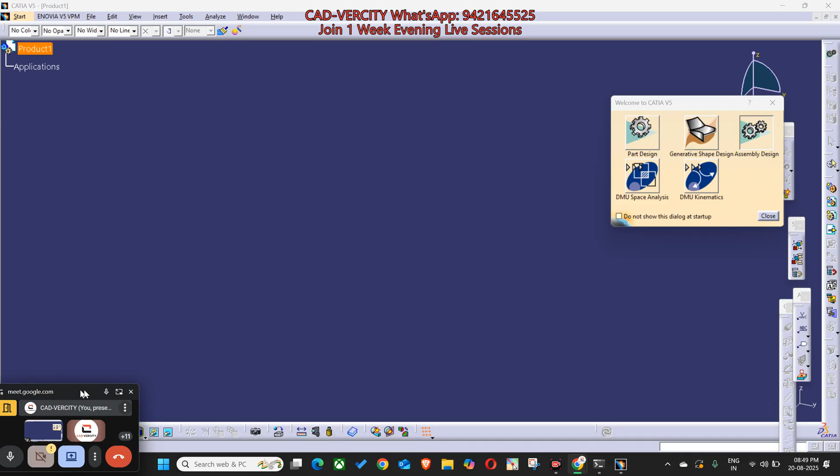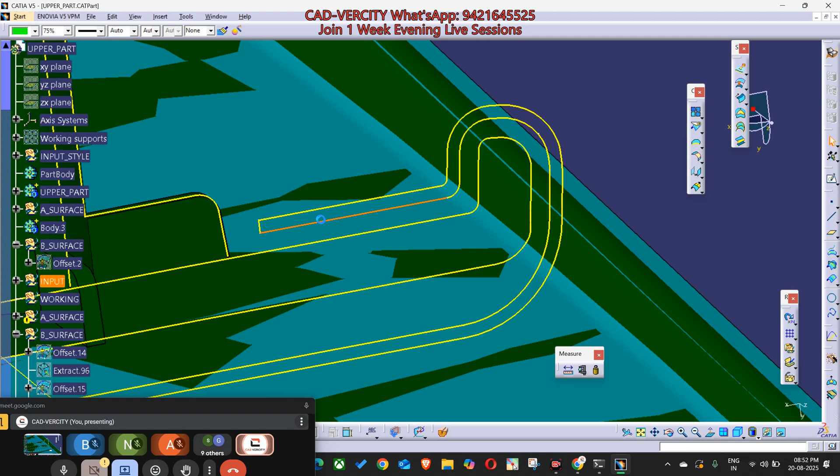Is it visible now? Yes, sir. So this is a complete product in a new window. If you have any doubt, you can directly unmute and ask. Don't wait for me to stop. So here we have master sections. Raja has defined some master sections. Let me explain what this is. The upper curve, this one is the leather.

So what is a master section? Suppose this is a part. Let's say Nilay, you are going to work on this part. But you have one team lead. Let's consider Ganesh is the team lead. Ganesh has at least 4 to 5 members in his team working on the complete project. Here you have one part. On the next side, in yellow color, you will have the structure part like this.

Third part is your grill part, speaker grill. Fourth will be, let's say, the armrest of the door. You know the HMI over here, you have some switches over here. Yes. Okay. And let's say again you have the map pocket. Let's consider this as a map pocket. This will be your map pocket.

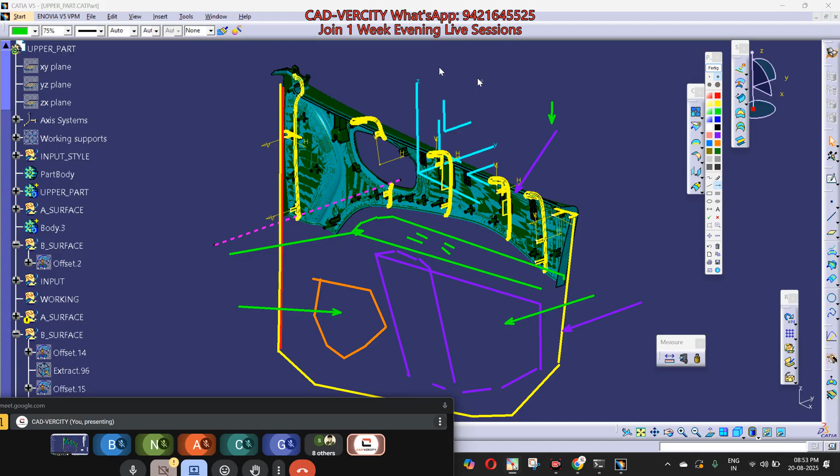Okay, and what is the role of Ganesh now? Ganesh as a team lead will define how the parts will assemble on each other, and how the complete assembly will be pre-assembled over here. You will have pre-assembly like this, and you will assemble the complete door panel assembly. Let's call it a sub assembly. This will be a sub assembly for BIW. You will bring the complete sub assembly of door panel and you will assemble it on the BIW like this.

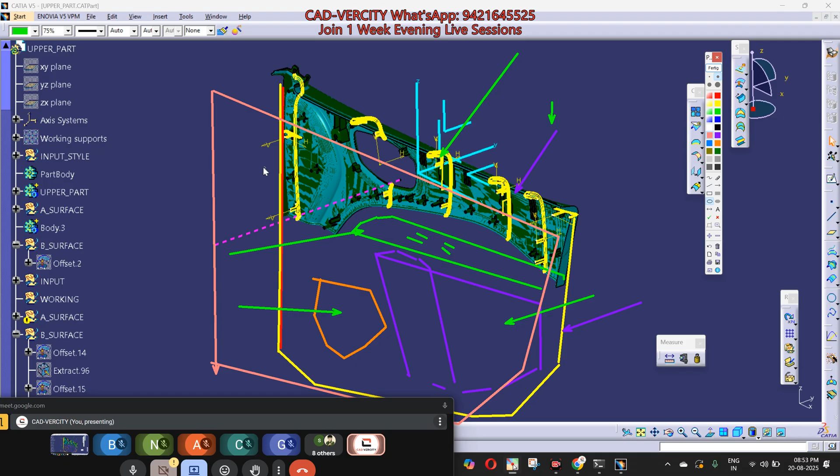Here you will have, sorry, here you will have the BIW like this, the metal structure on which you will have some beads for the strengthening and you will have some holes for the fixation like this. Okay. Tell me in which direction you are going to assemble the complete assembly. So how to decide the directions? Can you see the compass? We call it a compass. Z axis, X axis and Y axis.

Right now just consider we are going to assemble the complete door panel assembly on the BIW in Y direction. This is Y direction on this side, so let's consider this as negative Y. I will push the complete assembly on the BIW in this direction, negative Y direction. This direction is okay for me, no issue. So Ganesh will decide: everyone, we are going to assemble the complete part. Then we will assemble the sub assembly of door panel. It will be a top assembly on the BIW.

Now for the assembly, we already have one strategy. We are going to use some clips which we will receive from the vendors. Tell me, will you design the clips or will it be a standard part? It should be a standard part. It should be a standard part which we will collect or buy from the vendors. Okay, I have shown you the clips. Now, what is the use of master section then?

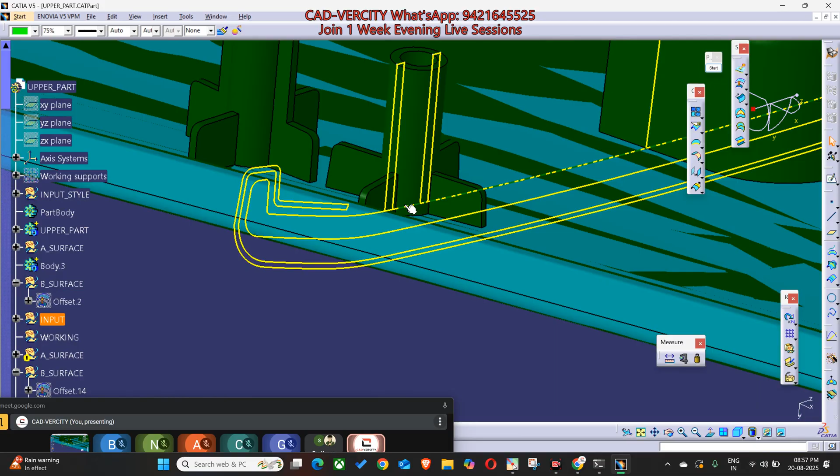If you see over here, what is master section? Master section we have already done. We will repeat this topic in the next project, no issue. But in master section we will define the fixation strategy, how this part is going to assemble on the next part, how will be the trim. For new guys, I think you don't have an idea what trim is. The trim word we will use for two components. It can be a fabric, it can be a leather. We will call it trim. It can be fabric or leather.

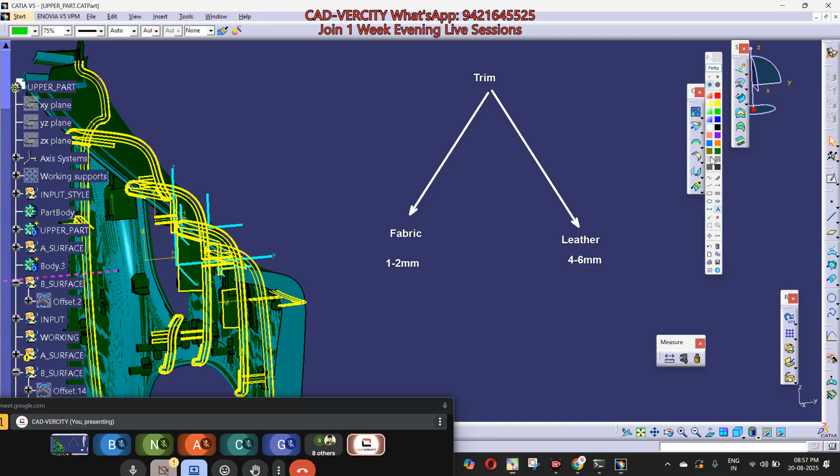Fabric means it can be a cotton or nylon material, just like a seat cover. Leather will be a little bit thick compared to fabric. Leather thickness can be 4 to 6 mm. Let's say fabric thickness will be 1 to 2 mm. We call it trim. Just keep the trim word in mind. Whenever I'm using the trim word, it will be related to fabric or leather. It's not the command. In CATIA we also have the trim command, but that is different.

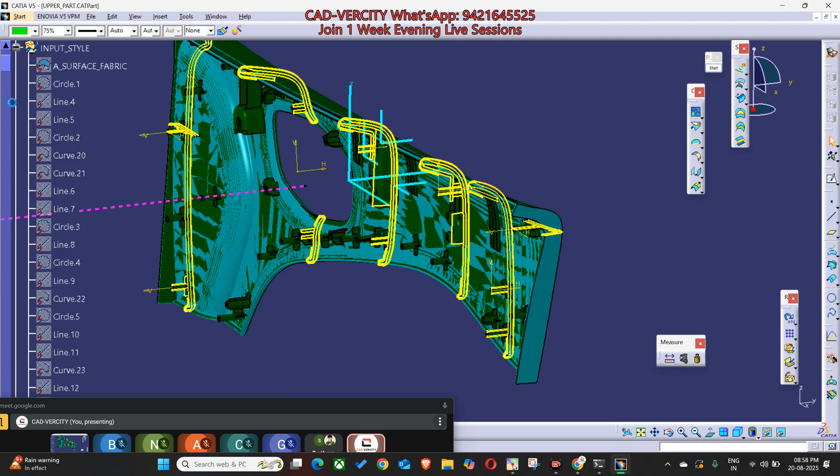So what is this? We have this style input A surface, class A surface. Here, input style A surface. Right click, and this is a surface. This we will receive from the OEM, otherwise we will receive it from the styling team. This is a style surface. Now we have to make a plastic part from this, but Ganesh has received some input as a team lead.

You have to consider the trim wrapping of, what was the thickness? Anyone remember? 2.7, I think. Ganesh, what was the trim thickness? Okay, sir, 2.7. And what was the trim thickness plus padding?

0.6, 0.3, 3.3, sir. Sorry, 3.3. 3.3, sir. No, 3.3 means it will be total. Yeah, total. 2.7 plus. Okay, so this is 3.3: 0.6 plus 2.7. Yes, correct. Yes, sir. Okay.

So trim of 3.3. It will be wrapping on the plastic part. Ganesh has received this input. So what is 3.3 then? It will be a trim thickness. So what will be the trim thickness? The fabric or the leather will be of 2.7 and this will be the foam padding.

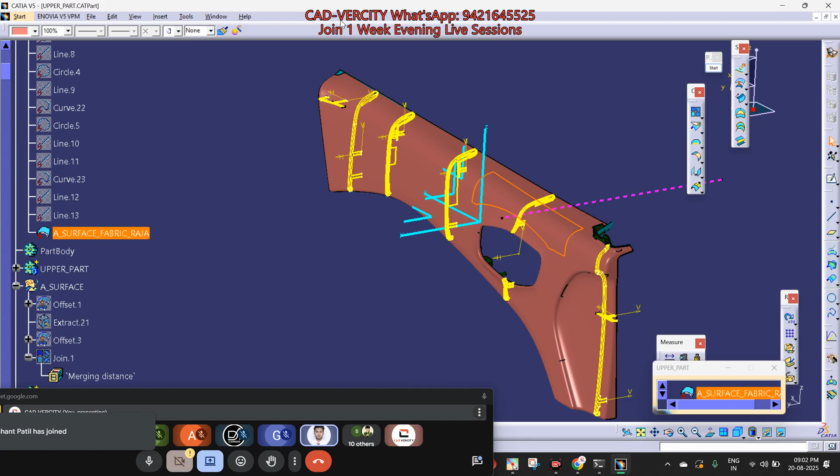Yes. Dassault is working on it, but how will AI be? I will explain this in another session. We will first focus on the project. I will explain how AI is integrating in CATIA. Even if you search on YouTube, you will get an idea how AI will be in CATIA. We have some videos.

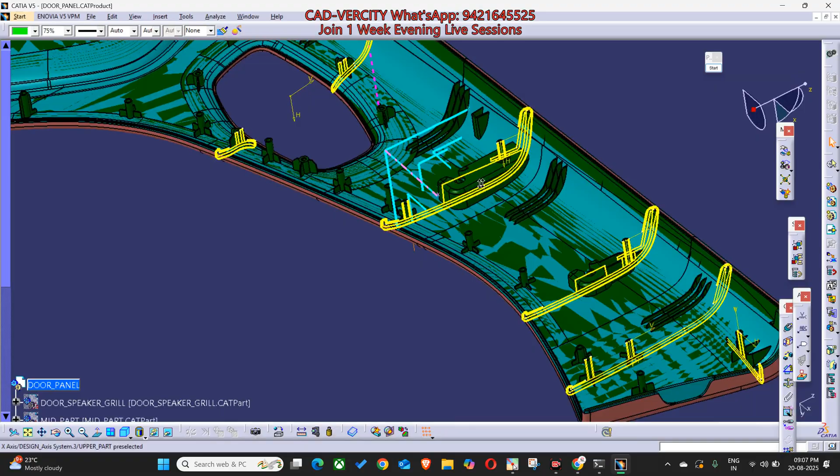Coming back to master sections. Now you got the idea. We have multiple parts. We have leather trim. Now we have the trim thickness: 3.3 will be the total, the leather will be 0.6 and padding will be 2.7. These sections we have drawn with the help of the sketching tool. We will learn this in trainings. Right now I will just explain.

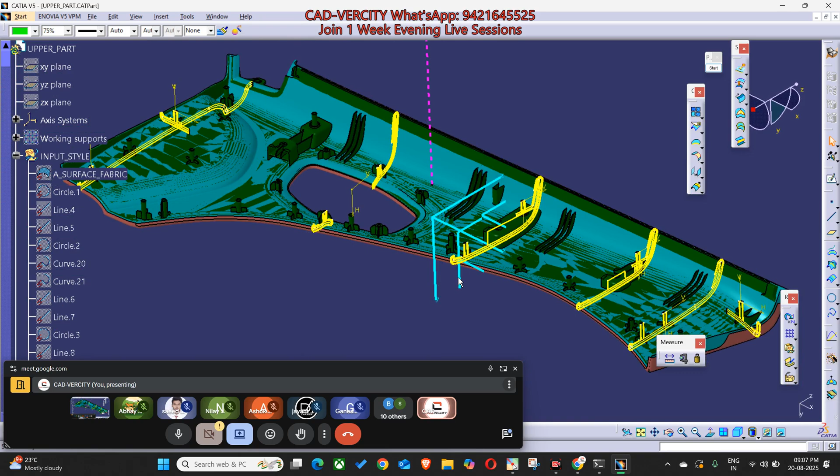In master section, Ganesh as a team lead will define the strategy: how parts will overlap, which type of fixation we will use, where we should use the welding bosses, the screw bosses, the dog house snaps, the locator pins, fixation towers and all. Here you can see, in master section we have defined the screw bosses.

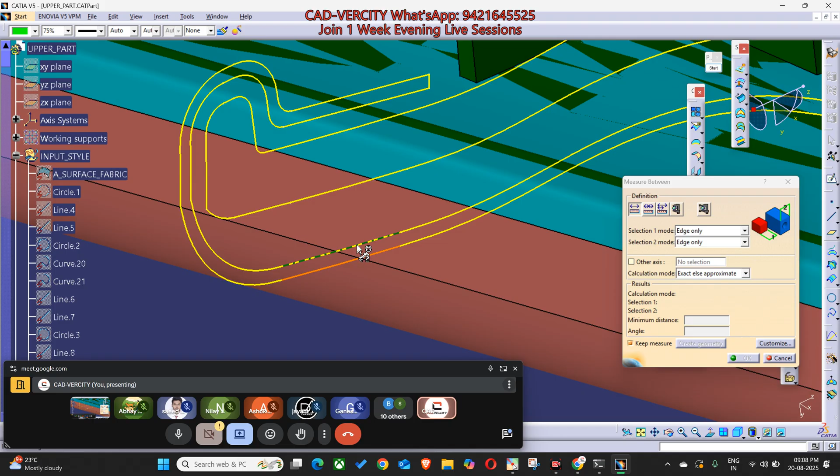Can you see the upper portion? This is the leather. So what is the thickness? Measuring tool, from this edge till this one. What is the thickness? 0.6 mm. From this till this one, what is the thickness? 2.7. Same we have noted down.

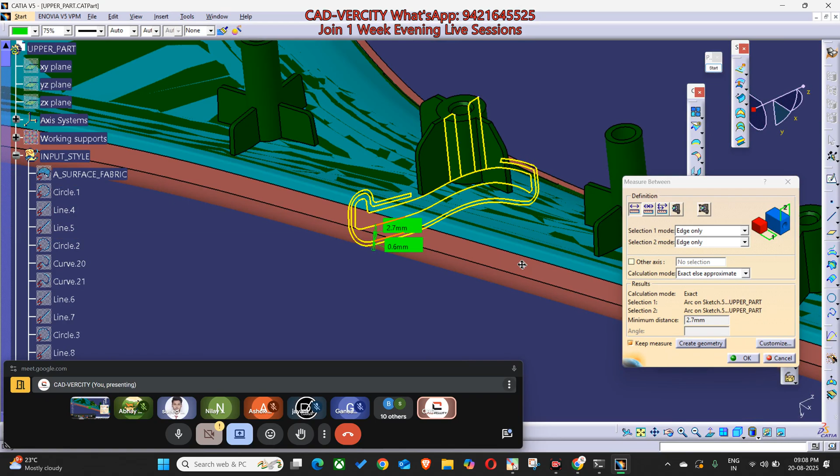0.6 plus 2.7. Suppose the blue one is a plastic part; on that plastic part, we are going to wrap the leather. If you notice in this master section, the leather will be something like this.

Hello, no background noise, please mute.

The yellow portion will be leather, the thickness will be 0.6. And on this leather we have foam padding of 2.7. So this will be the leather, and this in white color, I will use white color, will be the foam padding. 1, 2, 3, 4, 5, 6, 7.

Are you getting? The white one will be the foam.

So sir, how are we going to fix the leather with foam padding on the plastic part? We will glue this one, with some method. We'll discuss that technique later. Okay, just assume that we will glue this leather on the plastic surface.

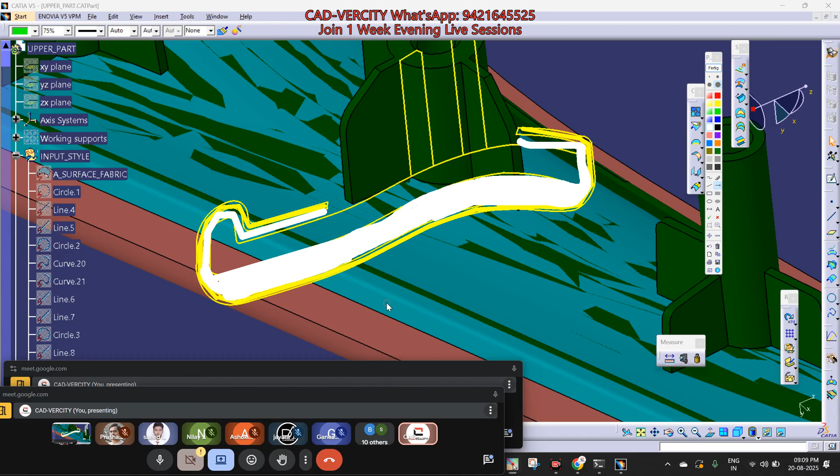Yes, any replacement, suppose I don't want to use leather, what will you use? Polythene, rubber material. Rubber material you can use. Good.

Okay, let me close this topic first. Can you see, if you notice sir, here we have maintained the thickness. Here we have maintained 0.6, and after 0.6 we have maintained 2.7. So why here we have the minimum thickness?

Because this is a turning portion. On the turning portion, the foam padding will get compressed, yes or no? It will compress, yes. Here again it will compress, and here again it will compress.

And from this portion till this one, we will use glue, highly pressured glue. Same, like this till this one we will glue here. So on the complete portion we'll glue it, no issue, but in this portion we will have some compression of foam padding.

Okay, now tell me, I think this point is clear. Nilay, got the rough idea what is the use of master section? Yeah, little bit. Little bit, no issue, so you have not done the basic, that's why.

So what Ganesh will do, Ganesh will define the master section on the places where you have the interfaces, meaning the fixation, the other parts, or overlapping. Can you see on this portion we have drawn the master section? Why? Because here we have defined one fixation, also we had shown some doghouse. Here you will have a cross section of this circle where we will have that clip.

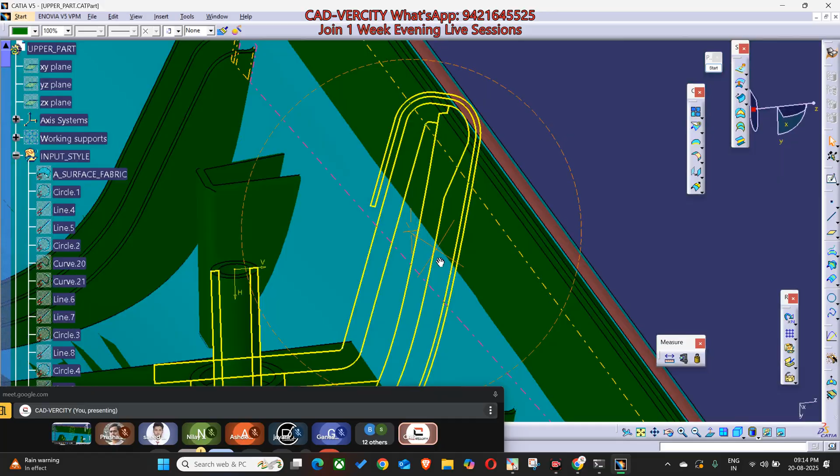And on this side we have shown how will be the plastic part and how will be the trim wrapping.

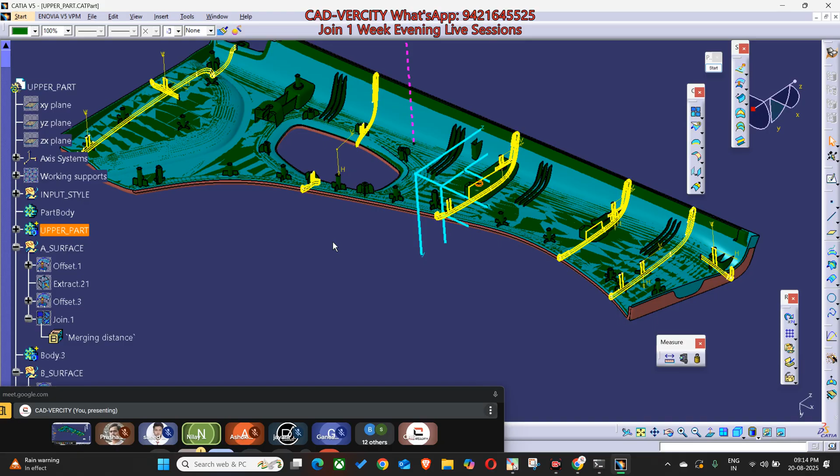I just wanted to know, initially you told that master sections are shown on the place where fixation is to be done, right? Yeah, as I understand, if I'm correct. So I would like to know how these fixations are being derived and defined.

Okay, so we have multiple projects. In the past we have done multiple projects. We have benchmarkings. What is a benchmarking? The methods what we have learned, from the past, from the past mistakes.

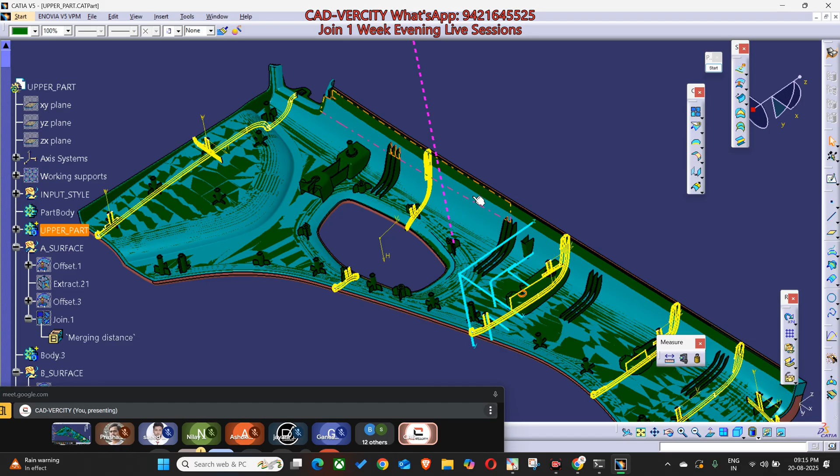We had defined some standard fixations, we had designed some rules for the fixations, mostly for assembling any part with the BIW. We have some standard fixation, some standard vendors. Mostly if you want to assemble a plastic part on another plastic part, we will use heat stake, and for heat stake we will use welding bosses. So here you can see we have the welding bosses. So standard fixation we already have from our experience, from our last projects, so we will take the reference from it and design accordingly.

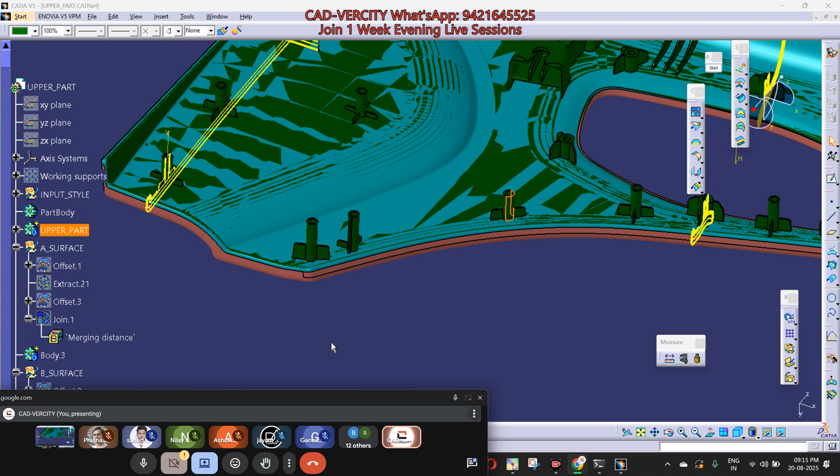So now, how will you define the fixation? We have some technical reasons why and how should be the fixation, and how to define the position of the fixation.

Okay, these points we will discuss later.

Understood. So what is the second benefit? Once Ganesh defines the complete master sections, Ganesh will share this master section with our team member.

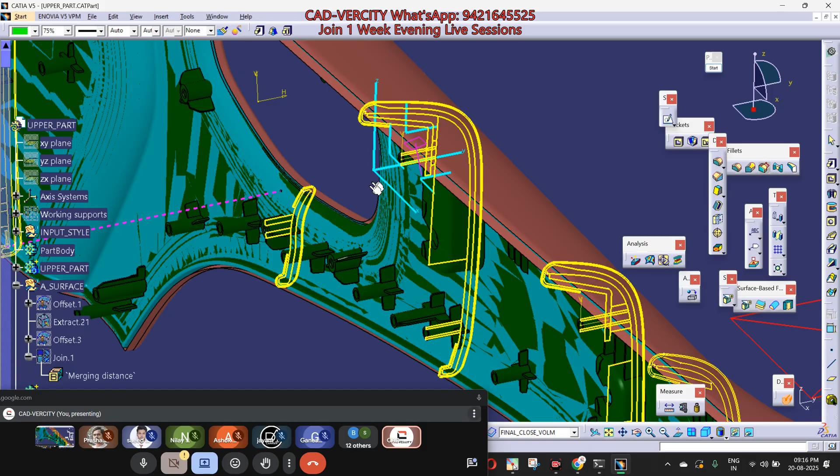Now what will the team member maintain? They will maintain the master section. They have the A surface. If I take the section over here, if we have the section on this position, like this. So here you can see the pink surface is matching with this section's outer line.

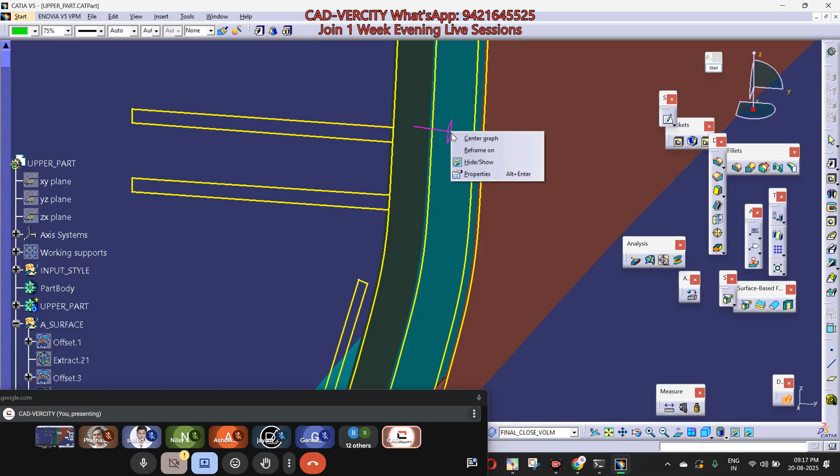Now, after that, we will offset it by 0.6. After that, suppose on this part, let's say Ashok is working. Now, Ashok has the master section, also Ashok has the pink surface. He doesn't have the green surface, no green surface, no blue surface. Only he has the A surface and the master section, that's it.

So what will be the process? Ashok will maintain and create a new surface which will match this line. So with help of this master section, Ashok will create a new surface for the plastic. So how will it be plastic?

Just now we discussed, this is 0.6 from this surface till this one. This is 0.6, and after this surface, this is 0.7. So Ashok will offset this surface inside by 3.3 mm to get the A style of the plastic part. This will be the plastic part, in green color. This will be the plastic part.

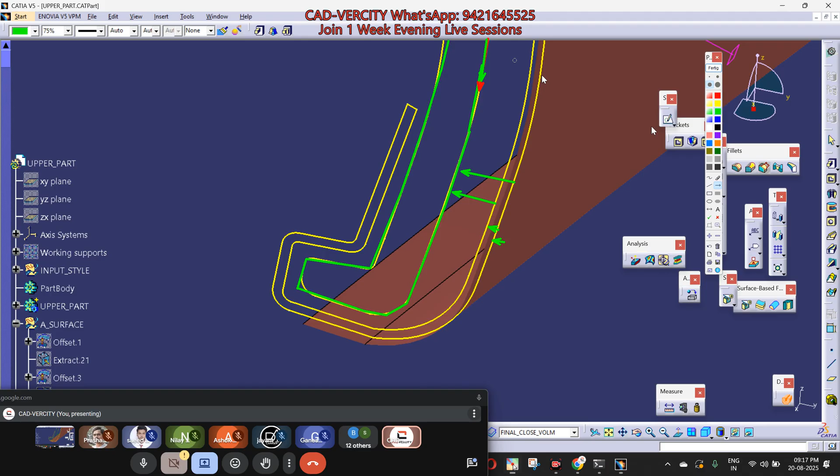Clear? So accordingly, Ganesh will share all master sections with his team members and inform them: okay, you have the A style of all parts. Now you can start your 3D, but please maintain the master section, because Ganesh has done the complete assembly story considering the MTD, meaning tooling direction, and all.

Just a doubt, sir. You told that we will offset the surface considering the benchmark of the foam, right? Not the benchmark, we have the inputs, sorry, the trim inputs thickness. So you told we will offset by 3 mm... 3.3 mm, right? So how will it be offset where the radius gets started and where the narrow sections are there?

So this portion we will cover in your trainings. Okay, thank you. Yeah, these are the project discussions. I have just given the basic idea.

What is now visible on your screen are the master sections. So you should know what is the meaning of master sections. Now you know trim, you know leather, you know foam padding, you know the master section word, you know the A style, class A style.

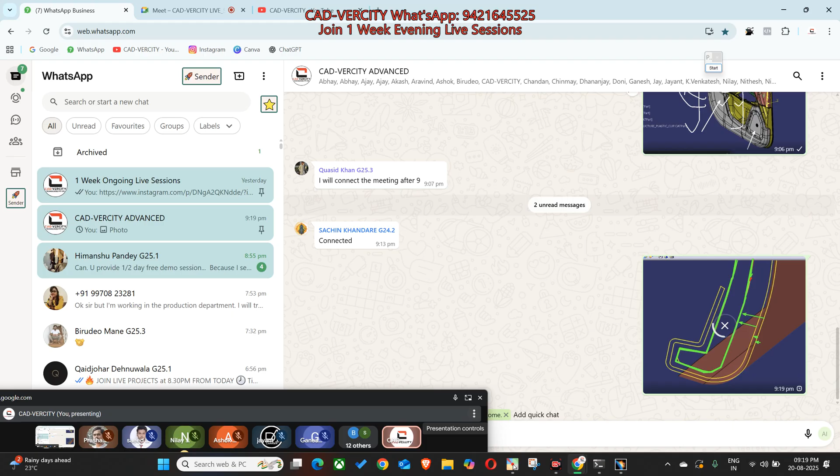Done. Okay, if you want to see the actual part, here you can see the actual part.

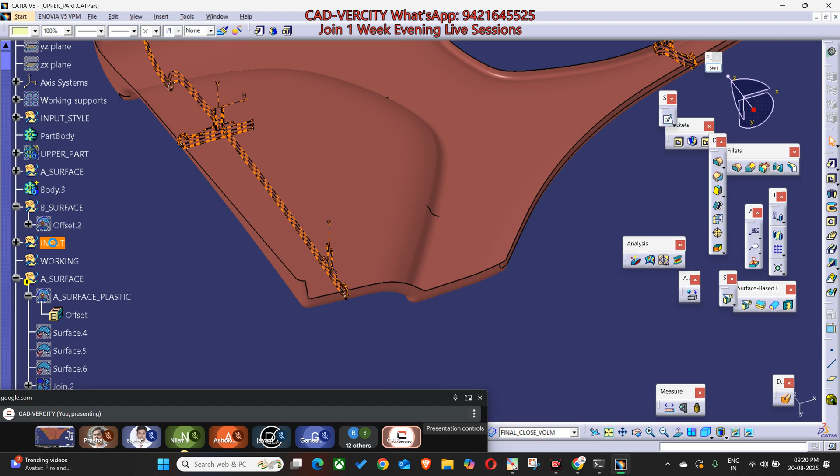I think we have completed the closed volume. Here you can see. So what is closed volume? Closed volume means the plastic part. There is one method, we call it closed volume.

Sir, in closed volume, what will you do? We will create A surface, we will create B surface, we will create C surface. After that, we will get this result. This will be our result. Let's hide the other.

Where is the A surface? Hide it. This will be our result of closed volume. And after this, here you can see some operations, we call it Boolean operation. So in industry, you have to follow the same methods. We have some rules you have to follow.

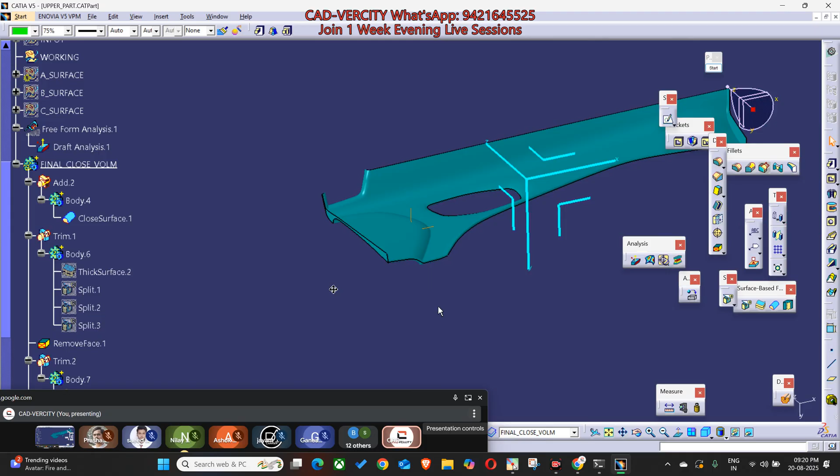So if I show you, this will be the result of the plastic part, this will be your plastic part. Once you're done with the plastic part closed volume, you will have to define the fixations like this.

These are the fixations on the green part. So this is a reference part, only for reference. You have to design, rebuild the 3D like this, and you will have to add this fixation on your blue body, the one I have created on my side.

So what is this green feature? We call it B features. What is this? These are B features, B side features for the fixations.

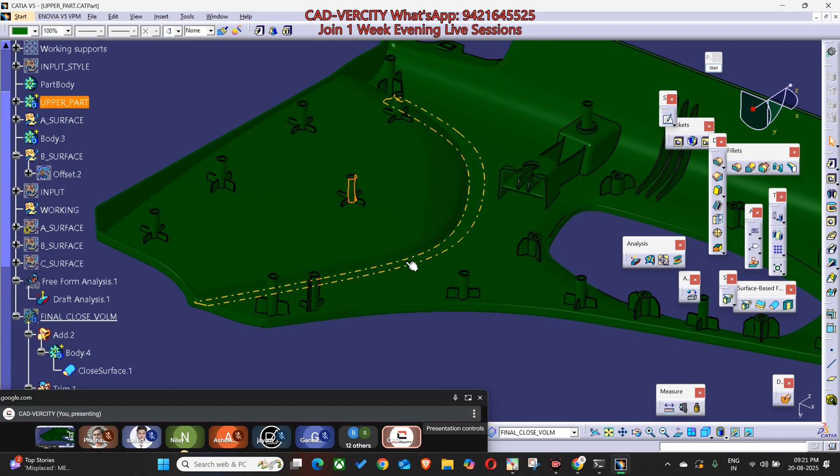Okay, Nilay, I think you are from plastic injections. So I think you don't have the idea about the heat stake and all. You have the idea? No, no, no. Actually, it's basically, we are under assembly. Yeah, yeah, no issue.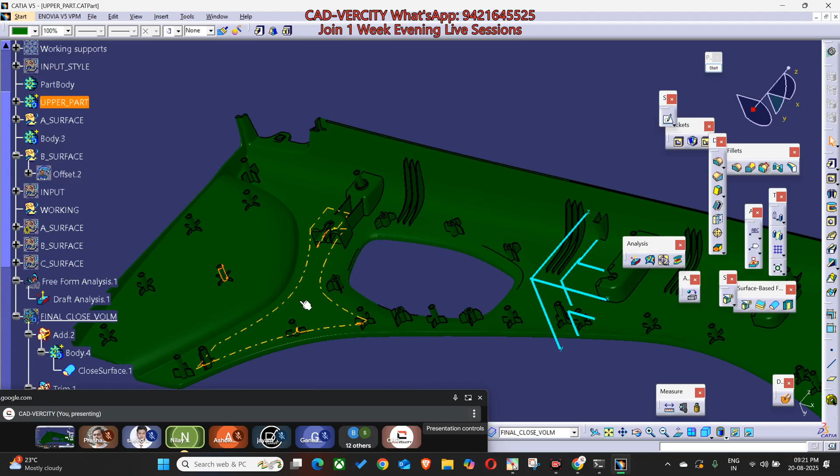But you know what is MTD, what is parting line, what is shut off angle? I think you should have the ideas. Frankly speaking, sir, my background is from tooling design engineer, and even I know just the starting basics of plastics only, thermosetting, thermoplastics, like that. I don't know more in detail what you're talking about. No issue, no issue, no issue.

Okay, is everything clear? Yes sir, discussed. Till now, are you getting it? Yes sir. Vinay, Arvind clear, Abhay clear? Everyone, any doubt? Yes sir, clear. Okay, Abhay, Arvind clear? Yes sir, perfect.

Now tell me, on which topic should we proceed? Raja, Ashok, Ganesh, quickly - how to create the feature.

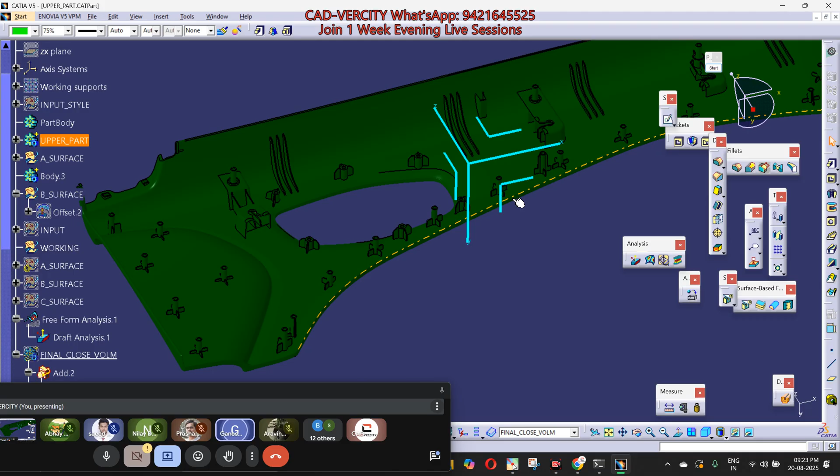How to create feature? Ganesh, I think here just you have to follow the remastering concept. But if you want to discuss how you will find out the lifter direction, slider direction, that point we can discuss.

Yes Prashant, any doubts? Okay, no sir. You tell me which topic should we proceed today? Jayant, Chinmay, Ashok, quickly, Raja?

Yes sir, actually I am doing a doghouse part sir. So sir, actually I am confused in the lifter direction, and the MTD and the MTD direction.

When I put an axis system with respect to MTD and give another x-axis with respect to lifter direction, actually that does not create a 90-degree angle.

I think last time you also asked the same question sir - if the lifter and the MTD is not in 90-degree, how to put the axis system and how to start?

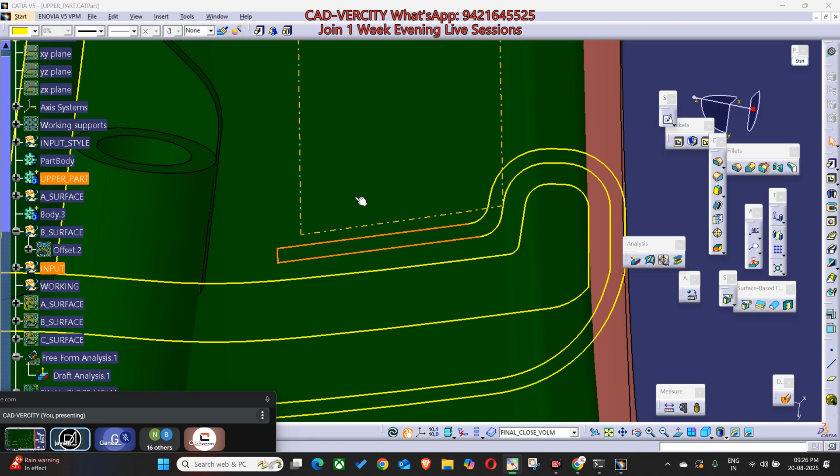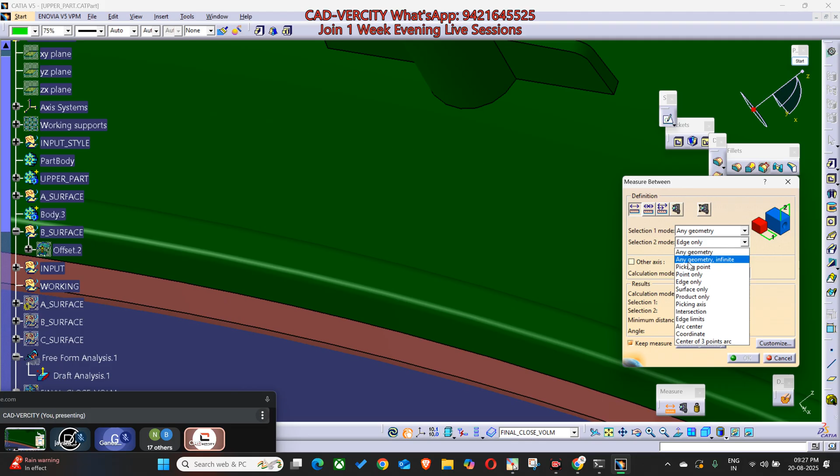No, okay. Here you can see, even though you have the master section, after this trim we have fixations. And if you notice on the complete periphery we have the welding bosses, from boundary we have left some space. If you measure the space between this geometry surface only, from this till this one, it's 15 mm. Got it?

Okay sir, got it sir. So if you notice, there is no fixation which is in contact with the extreme edges - see, we have some gap.

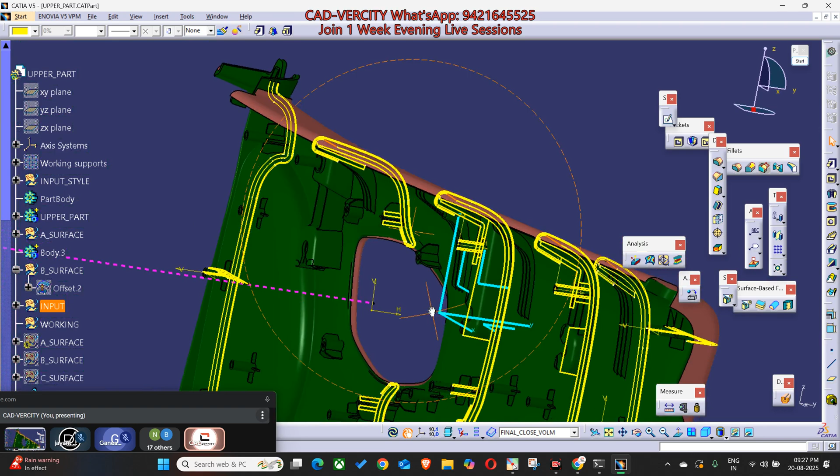Okay Jayant, suppose if you are defining the master section - I think you have an idea or not - previously I mentioned, please maintain these lines uniformly. In all master sections, let's say how many master sections I have - 1, 2, 3, 4 vertical, 4 master sections. So in all 4 master sections, the length of this edge should be constant, the length as well as the angle. If I draw the line tangent to this one, this angle, let's say x degree, and the length L.

This should be constant in all 4 master sections. Okay, tell me, if you keep this 10 degree and in next master section if you are changing the angle, instead of 10 you are keeping 45 degree, will it be uniform? Can you imagine how will be the part? Wavy? Uh yes sir, waviness will come in this sir. Okay, so that's why it should be uniform.

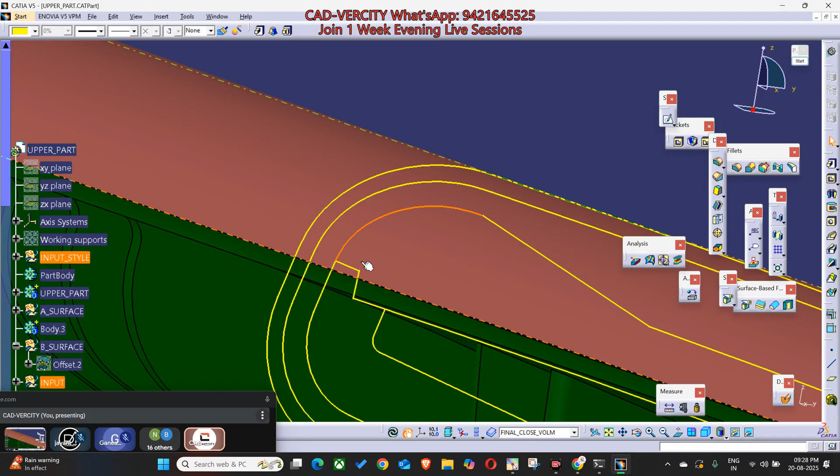Even though if you are adding some fillet value over here, keep it constant, for upper portion as well as for the lower portion. Okay, if you are maintaining the parting line over here, keep it constant.

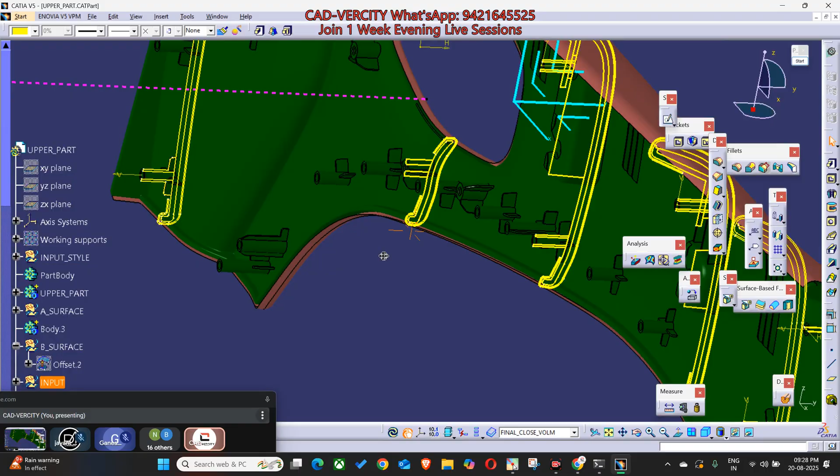Okay, then only you will get the uniform sections. If your sections are perfect, your A surface, style and your 3D will be perfect.

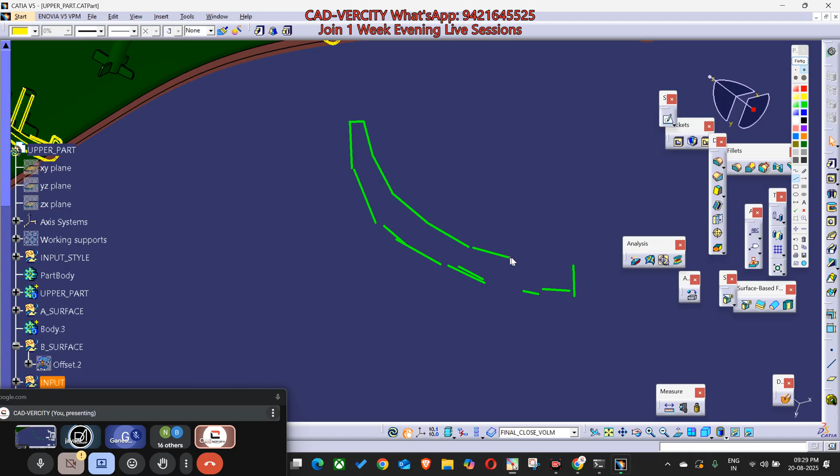No, it should be gradual. Remember we had done a closed volume for the A pillar. Remember there in sketches we have maintained the sections. In that part we don't have the uniform thickness. Suppose this is the A surface, here you have to maintain 2.5, here you have to maintain 1 mm, so you will go like this. Okay, got it. Okay, Raja shared the file.

Hello, sir. Yes, Ashok. Sir, the purpose of gluing is to provide tightness of the fabric to the plastic part. Plastic, yeah. It is correct. Okay, perfect.

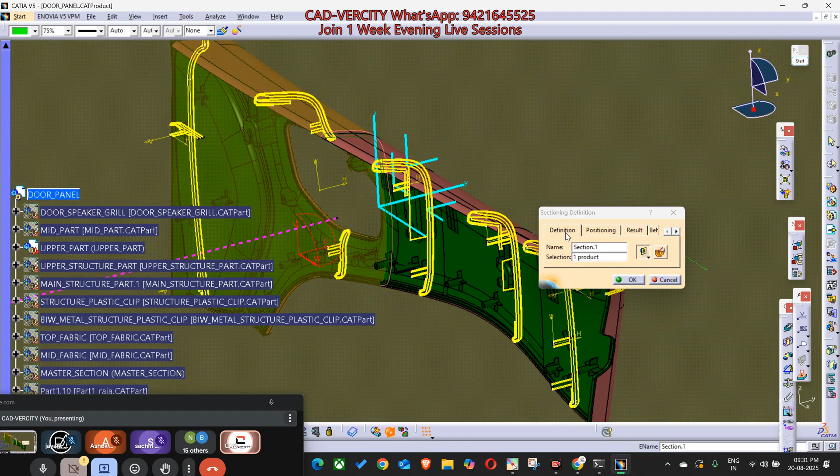Okay. So suppose we are in product. You are using this section, sectioning. Now if you want to cut this part, here you can see the first tab, definition, here you can see the cut, volume cut. Click on it, you can see. Now your question is how to come back to the original position, revert. Again click on this one, deactivate this one. Clear? Yes, sir.

Okay. Raja, did you rename it? Yes, sir.

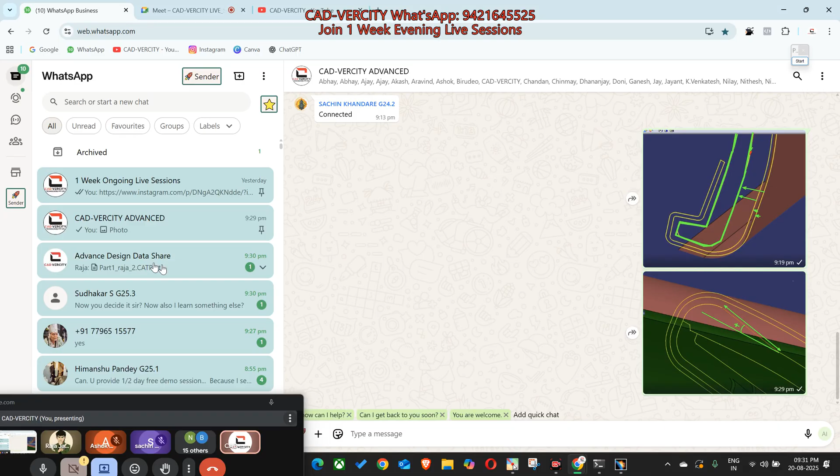Just a question. Yes, Nilay. I think this is the assembly workbench in CATIA. So I would like to know, do we follow a top-down assembly approach or bottom-up assembly approach to make this part? Good question. Anyone wants to answer? If either or, then I would like to know the reason as well. Could you please repeat the question?

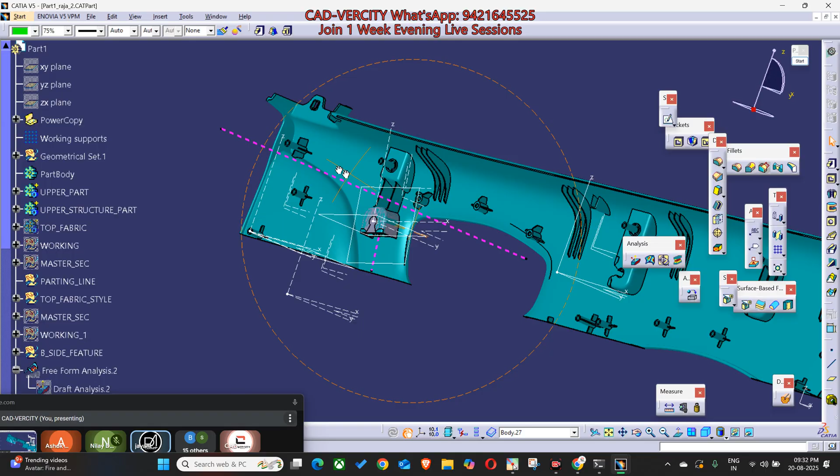My question was, what intent do we follow while designing this whole assembly? Top-down or bottom-up? Generally, in top-down, we make the product name and we make those products in the assembly. While in bottom-up, we bring the parts individually from the folders. So which do we follow, and if either, then why?

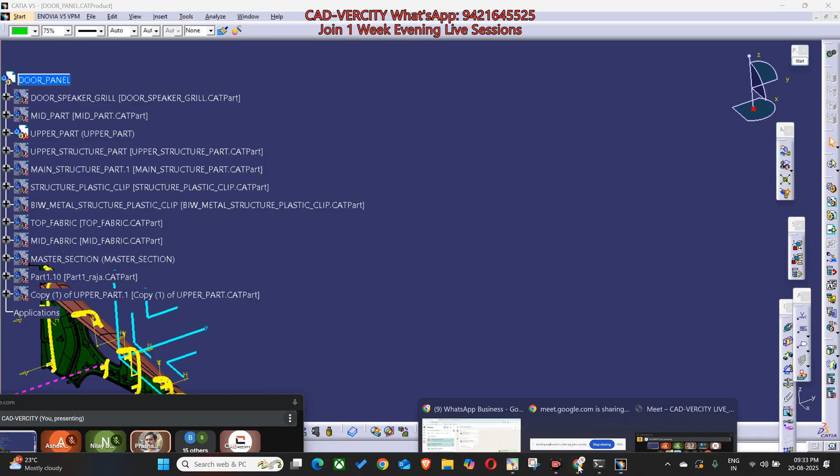Quickly, anyone wants to answer? Top-down assembly, because we are designing parts in assembly with respect to the input, and we will have one absolute axis system, which we call the vehicle axis system. So we need to refer to that, check the assembly and its counterparts are matching, and maintain their gap and flush. That's why we go top-down.

Good, Prashant. Anyone else? Ashok, Raja, Ganesh, Jayant? Same answer, sir. Nilay, you got it or shall I explain? I would like to get more in detail. Okay. Let's take the same example, you have the BIW. Nilay, do you have an idea regarding what is top-down and what is bottom-up?

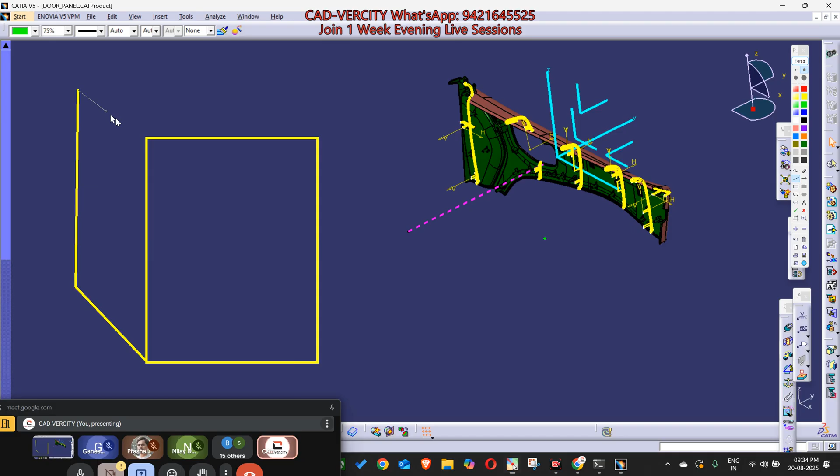Let's say you have one room, you have some space like a box. Okay, like a box, like this. You have some height, you have some width, you have some length. Okay, now you have to design something inside this box, but also you have to fix it inside these holes. You have some holes on all sides, on top as well, on this side as well. Okay, these are the rear edges. I will draw the backside edges in green.

Okay, now Nilay, you want to design something inside this box. Let's say you want to make a statue of Lord Ganesha inside this box. The height of that statue will be, let's say, 60 feet by 50 feet by 80 feet.

Okay, tell me, if you want to design such a huge statue, what have we provided some holes for? Will you design from the clay directly, or will you create some skeleton first? I think we will create a skeleton. Good. So we are providing you some holes where you will fix your skeleton. Now you have the rods which you will lock like this.

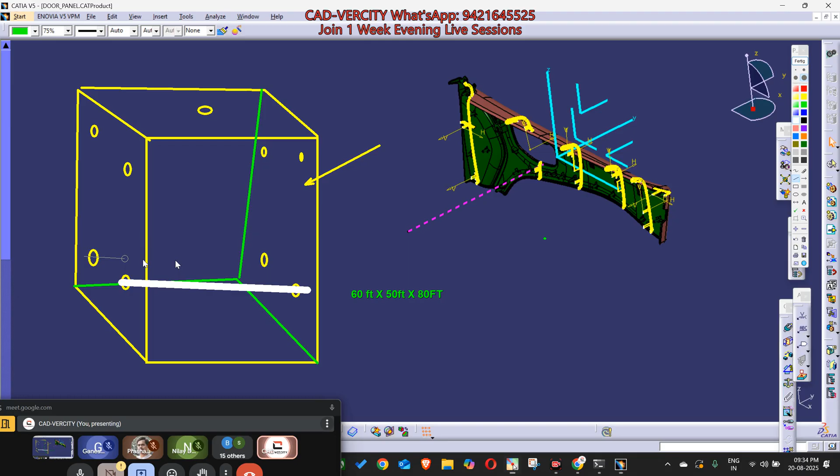Sorry, let me change the color. White. You will pass some rods like this. 1, 2, 3, 4. Okay, and first the middle one. I will just connect this one. Okay, now this is your skeleton.

Now tell me, will you create this skeleton in this position, or will you do it somewhere in space like this? Suppose here is a playground of the society. Will you create this skeleton over here on the ground like this? Okay, sir. These will be the first two. Then I will keep one vertical. Again, I will keep these two.

You will create this skeleton over here, and will you bring the complete huge skeleton of 60 by 50 by 80 inside this box and fix it inside these holes? It is not possible at all. So we will create the skeleton as shown in the yellow background, inside the box. Yes. So we call it top-down assembly. Which one in the yellow box did you mean? Yeah, the first one.

This is bottom-up. You are creating something over here, then you will bring it over here. But while you are creating it over here, you don't have any reference of these holes. What is the distance between holes? What is the height between these two holes? What is the box width and height? You don't have it. But you are creating something over here. Now, if you bring the complete assembly over here, you get the idea: these holes are not matching.

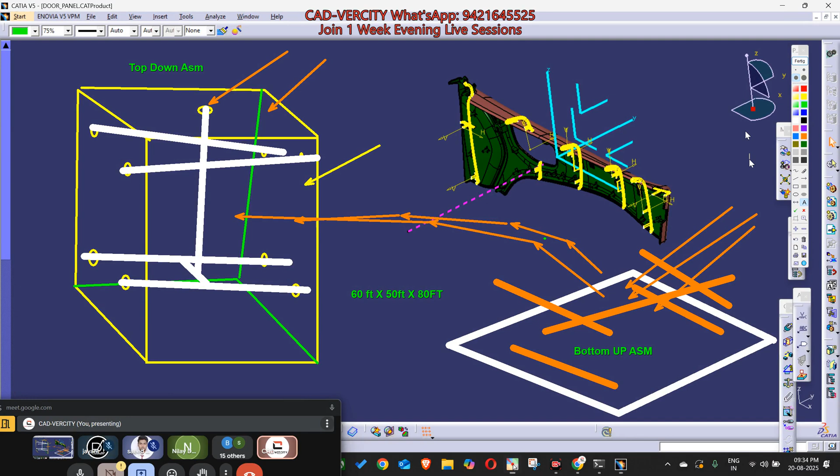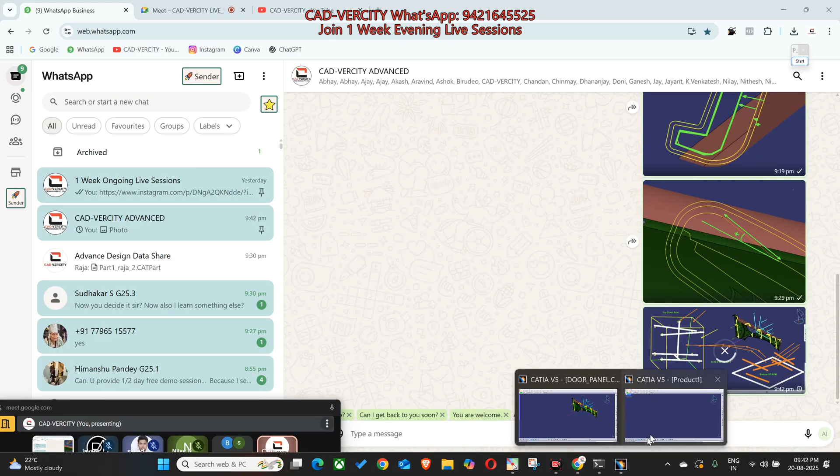Okay, now Jayant, let me clear your doubt. So, what is design? What is assembly? Tell me, there is one guy from the styling team. Let's say Birudeo. Birudeo is from the styling team. He wants to design the surface like this.

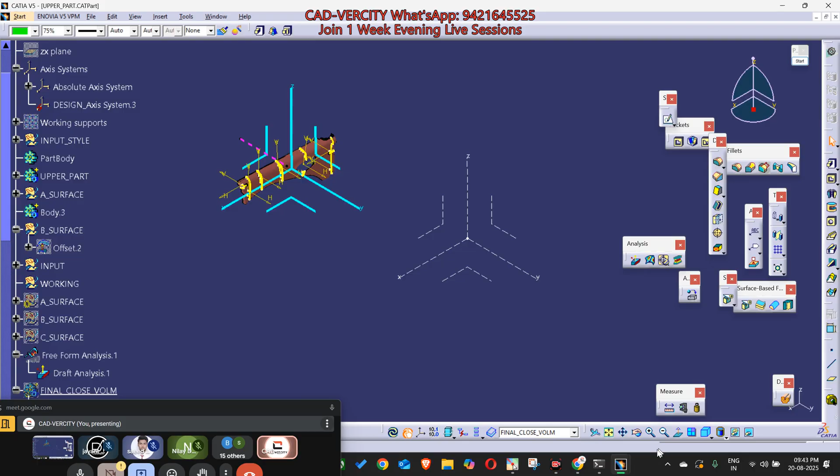So, do we have the absolute axis system? Yes. Okay. So here we have the absolute axis system. If I click on ISO, this is my absolute axis system. So this side we have the door panel. Now, if I take the top view, click on Z. This is the top view.

Now where is the front side of the car? This is the front side. So here we have one seat. Here we have the second seat. Here we have the gearbox. Here we have the dashboard. And here we have the steering, let's say.

Now suppose Birudeo is from the styling team. Tell me, Jayant, in which location should Birudeo design the surface? See, we can't start our 3D without a surface. So we are waiting for the style we will receive from Birudeo. So Birudeo wants to start the style for this part.

Tell me, can Birudeo start his style over here, anywhere in space like this? Yes. I don't know. No. Can he design over here? He will take one axis anywhere like this in space. This is the axis. Now Birudeo will inform us, okay, I have designed one style. Take this style and start your 3D.

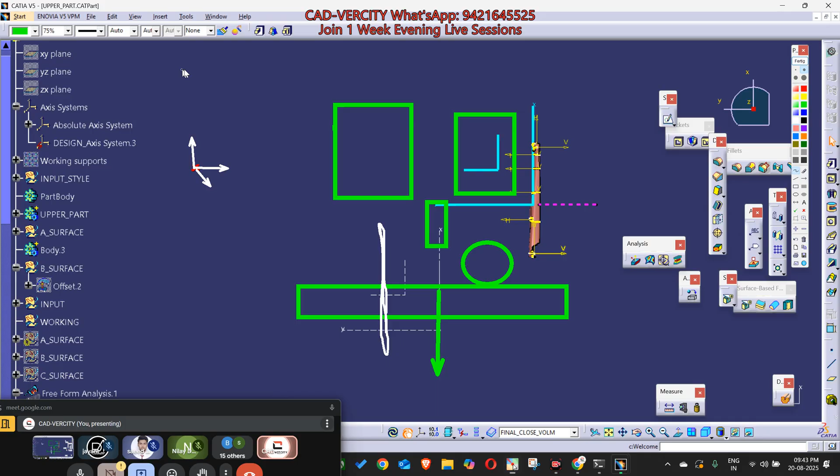Tell me, if you take this style file and copy paste it in your product, you have the absolute axis system over here, and this is the complete architecture of the car or the seat. Once you copy paste the style file you received from Birudeo, the position will be here. Now, what will you do? It's not your mistake. Birudeo should design his style in this position. Got it, Jayant? Yes, sir.

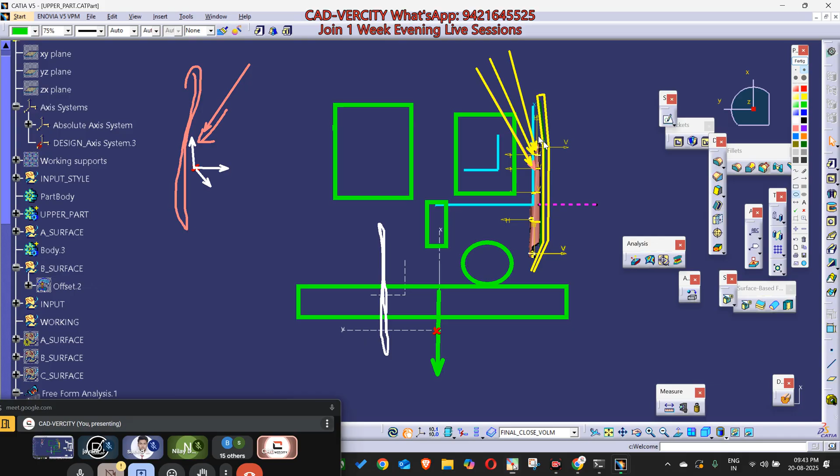And it should be with respect to the BIW, which will be common in your file as well as Birudeo's file. Okay, this will be the BIW. Clear? Yes, sir. That means Birudeo will design his style. Then with respect to that style, you will design the 3D. With respect to that 3D, you will design the fixations which will be fixed on the BIW. So everything you do in this position, we call it the product position.

Sir, then what is bottom up? Tell me. You're going to buy some clips. You know the clips we have just seen, this type of clip. Yes, sir. Tell me, someone has designed this clip, yes or no? Without design, you can't manufacture any part. So you have this clip like this. Let's say Suyog is our vendor. Suyog has designed this clip.

Tell me, is it necessary that here is the axis system? Suyog has designed this clip and he has also manufactured this clip. Now he's your vendor. He's going to supply this clip. Is it mandatory that Suyog should design and manufacture this clip in this position, which you're going to use? No, sir.

Nilay clear, Said clear, Birudeo, everyone, Suyog, Jayant, Akash, Ashok, Sachin, Shweta? Yes, sir. Okay, so this is bottom up. Got it? Yes, sir. I got it, sir.

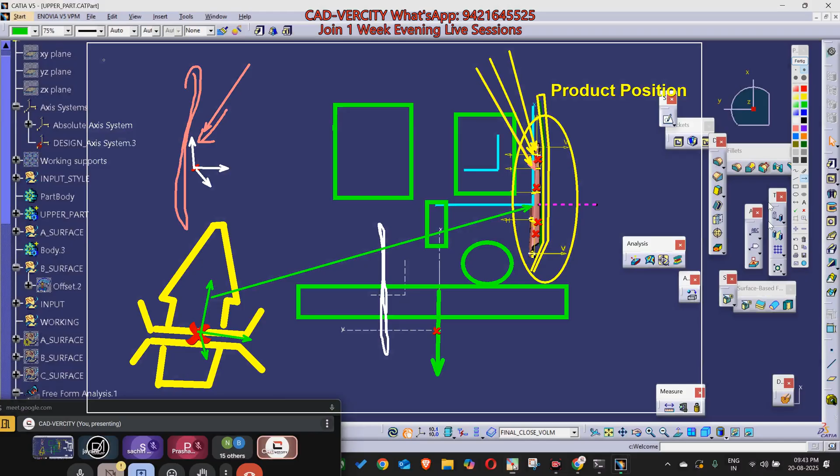Then, sir, in bottom up, which reference have they taken? No need of reference. Tell me, Ganesh, what do you want from the vendors? Clips, screws, nuts, bolts, washers. Yes, sir. These things you want from the vendors. Tell me, have they taken any axis system, any reference? Do you have any blocking point? Can you use that screw? Can you use that clip in your designs?

Yes, sir. What is important for you? The diameter, the pitch distance. What is the pitch of the screw? Is it M5, M6, M10, M15? What is the diameter of the clip? It should match with your BIW. That is important for you. The axis system, how Suyog has designed that clip, in which position he has designed it, no issue. That is not important.

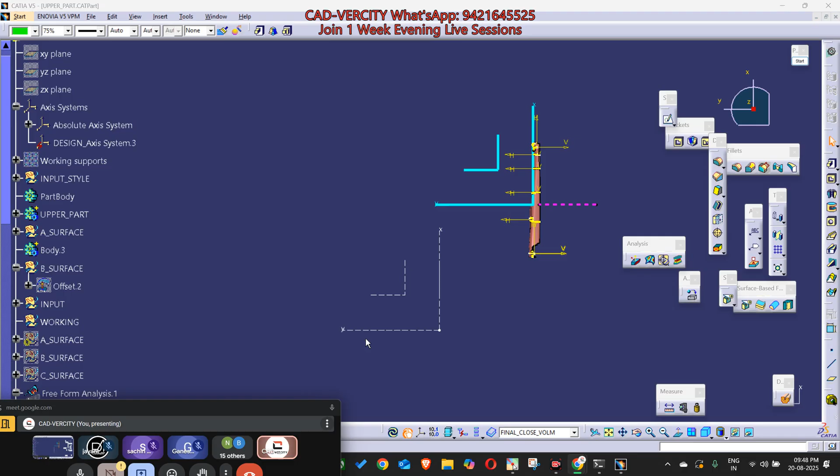Even for the switch box you have, let's say here we have one window. What is the purpose of this window? Quickly, what will be here?

Quickly. Latch, sorry, latch. Handles. We will have latch. Let's see: locking, unlocking latch. Okay.

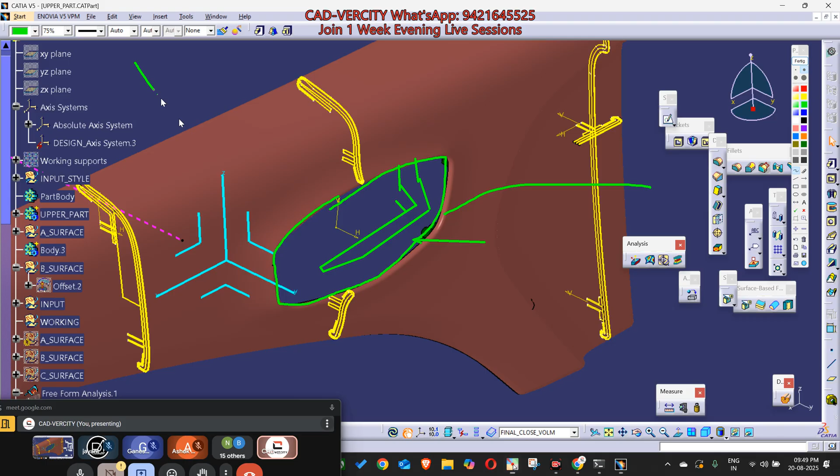So tell me, suppose you are designing this latch, no issue. But if you are buying this part from the vendor, what will be important? The important thing will be the boundary. Yes, position is not important. Anyhow, we are going to bring that part from inside. We will put it from inside, and we have the screw bosses. We will add some screws. That's it. See, we have screw bosses.

One, two, three, four, five, six. Done. No need of axis system. No need of the proper position of design and all. Why? It is a standard part. If you want to design that part, let's say you are working for Audi, BMW, if they are telling you no, we are not going to buy this part from the vendor, we are going to design and manufacture this part separately.

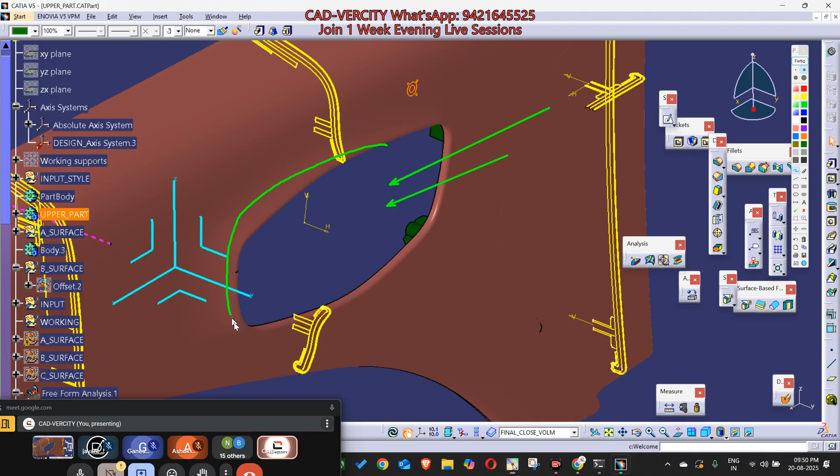It will be of chrome. Mostly the latch will be in chrome. So we are not going to take from any vendor, we are going to design. In that case, you will have to consider the latch in your master section assembly, and you will design in this position only. You will not design somewhere here. Got it, Ganesh? Yes, sir. Clear, everyone? Yes. Okay. Any other blocking point?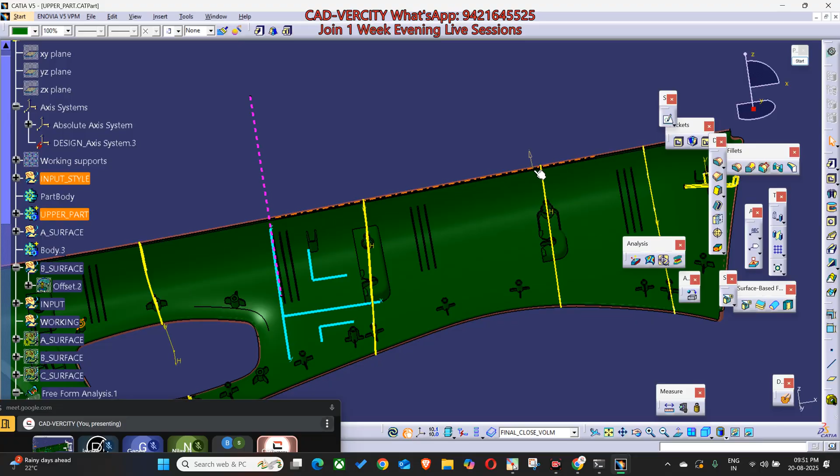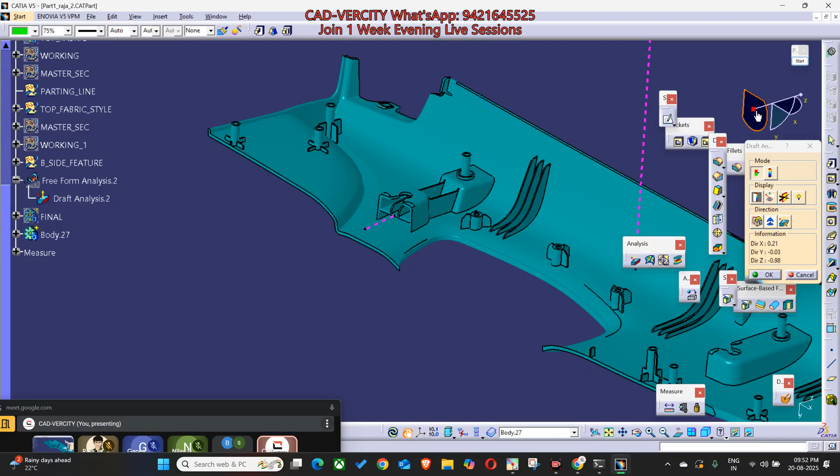Okay, we missed one point. So how to find out the lifter and slider direction? Raja, is this your file? No, this one. Okay, let's hide everything. Let's hide all axis systems. Sir, check my lifter. This is your lifter direction. This one. Yes, sir. Unhide. Done. So is it okay or not okay? Just perform draft analysis. Double click, put it in material mode. Material is okay. The compass on this one. Select compass.

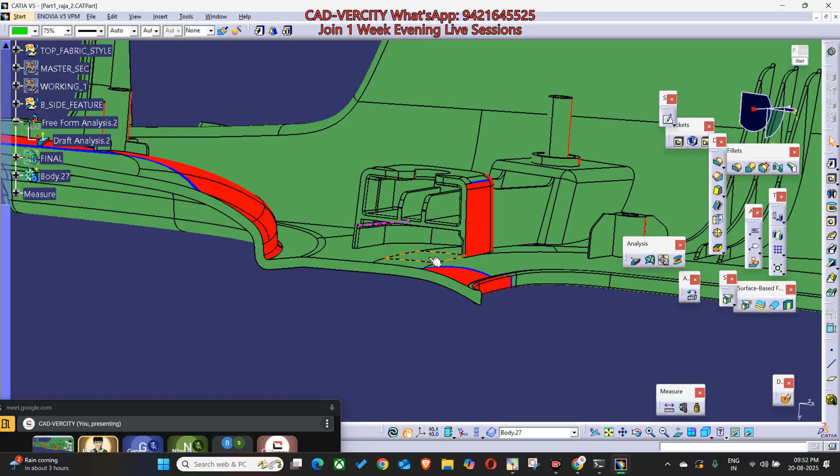Okay. Raja, tell me, this face should be in. Yes, sir. Okay, this is a dump file. Yes, this is a dump part. Put it in edge mode. If I perform draft analysis, sir, on this MTD I have given some angle, so that creates the red patches. If I did not give any angle, see, the lower red patches are there at the cross section. Shall I take the section like this?

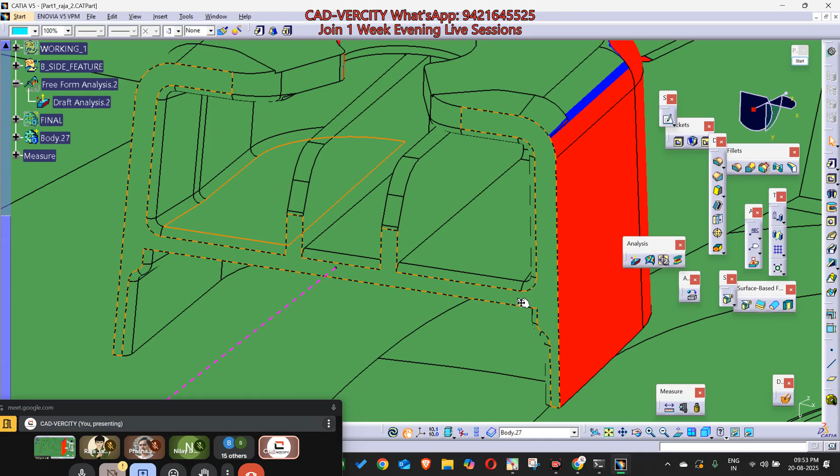I agree that you have raised the angle, increased the angle, just to clear the front portion of the plastic part. Yes? Yes, sir. Okay. Now tell me, this height is important for you, yes or no? No sir, that height is not, but the ribs are important. The rib height is important for you? Yes sir. Okay. So we will maintain this height. Tell me, these faces are important for you, yes or no?

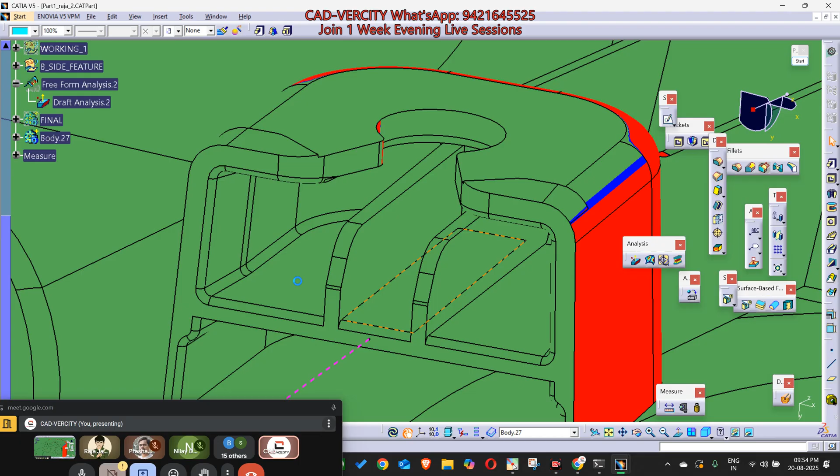No sir. Can you change the angle? This face, is it important? No sir. Can you change the angle? Yes sir. If you change the angle, is it affecting your A style? Is there any sink mark issue? No sir. For tooling, you are just changing this angle. No issue. But we will maintain this face. Tell me, can you change this face now? No sir. No. Why?

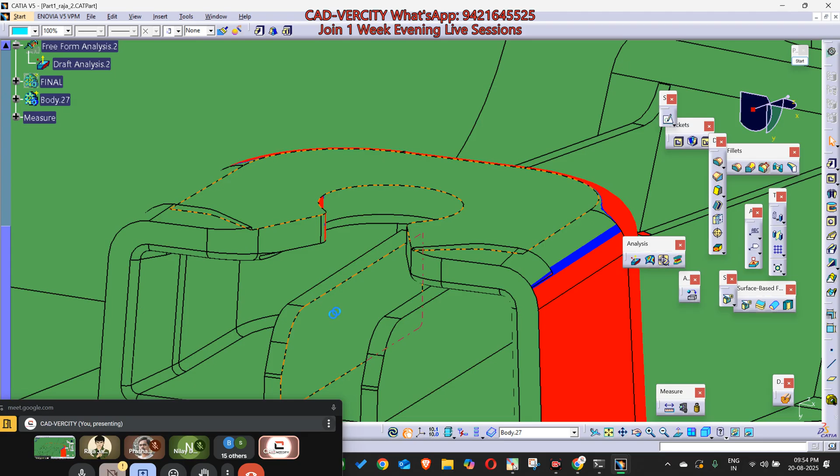Actually, that face is with respect to the BIW. Perfect. So your clip is going to rest on this face, so we will not change this face. Okay. Can you change this face a little bit? Yes, sir. Can you change this angle? Can you apply some small angle, 0.5 to 1 degree, just to avoid this red portion? Yes, sir. Done. No issue.

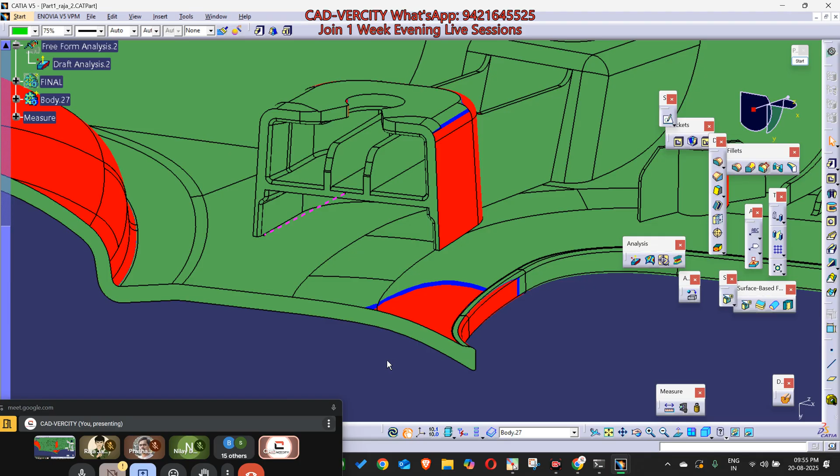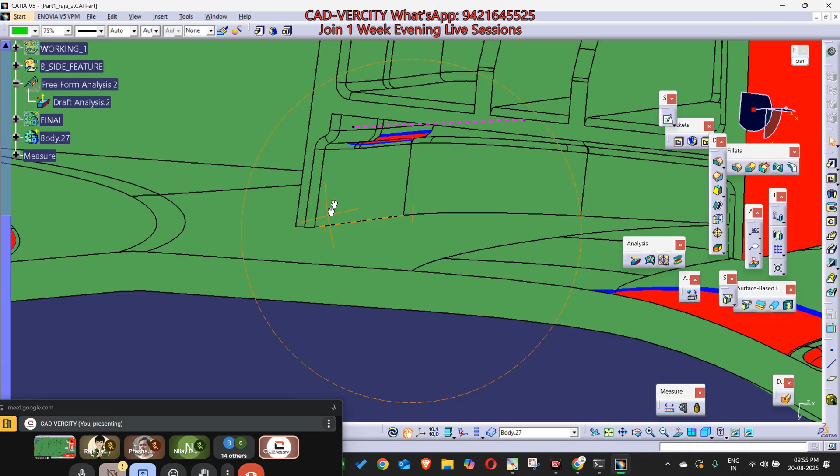Got it? Okay, sir. So like this, you should think: whenever you're working on any part or any project or any product, just think what is important and what is not important. If it is not important, you can leave it. We are going to use leather wrapping. I will not think about the sink mark, and if I'm not trying to avoid the sink mark, it's okay, no issue. Why? Because we have the leather wrapping. But technically, as a designer, you should consider this one.

See, we can cancel this sink mark. Let's say if I cancel the core out, tell me, are we going to avoid the lifter? Can we avoid the lifter if we cancel the core out? Yes, sir. No. Yes or no? We cancel the sink mark. We cover with our leather part. So if we cover with the leather part, we can cancel the core out.

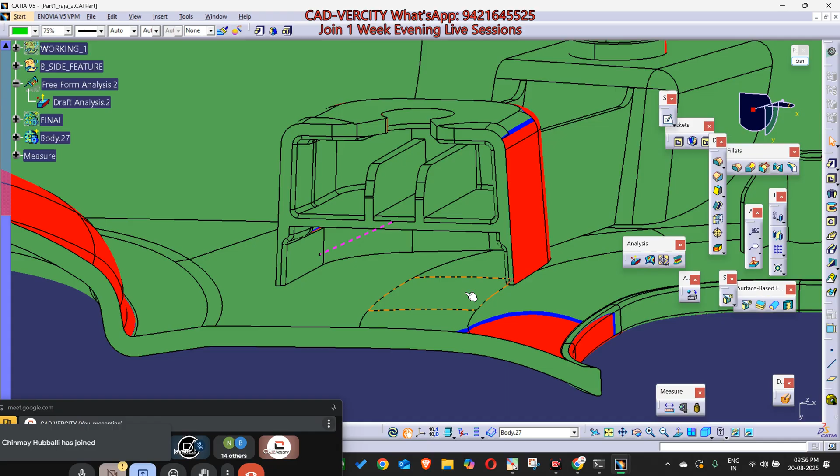No. Raja, even if you cancel the core out, can you reduce the tool costing? Can you cancel the complete lifter block? No, sir. So anyhow, if you are using the lifter block, you can add this core out. It will not add any additional cost in your tooling. Got it? Yes, sir.

Okay, now suppose you have a locator. Do we have the locator on this part? No? Okay. Let's suppose you have a huge locator of 2 mm like this. 1, 2, 3, 4. This is a locator. Tell me, will you reduce the part thickness? Will you reduce the locator thickness? Would you think about the sink mark?